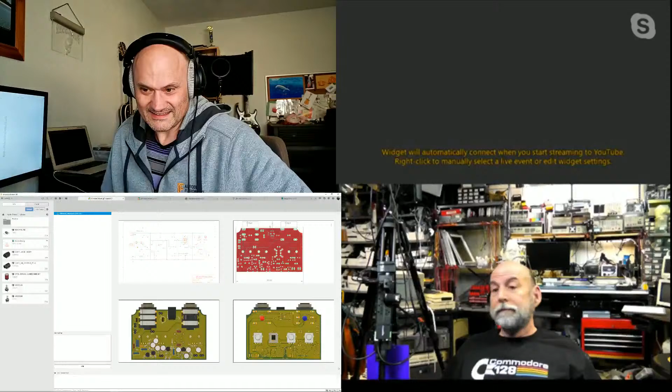So, yep, Bill's voice is hanging. Yeah, what can we do to fix the voice? What was the comment there? They said it's hanging. Like getting stuck? I was getting, yeah. You closed Opera, right? I did. I'm sorry. I'm hoping that by reducing other applications on the system that it... Now I lost you. This is not working. I've lost you. I can still hear you fine. All right, you're back. Yeah, it's just the Skype call bandwidth is obviously not that great. I guess this is the beginning of the end, and we're waiting for FEMA camps to open, right? Yeah. Anyway. Somebody's making a joke here.

So, since I can't talk very well, you want to show us, did you manage to pull up the Qucs example? Oh my gosh. Oh, sorry, I didn't mean to spring it on you. Yeah, but this is what it's about, right? You spring Qucs on me every time. Well, I've been advertising it for 4 weeks now. Well, we talked about it last week and the week before. Well, I guess we did. Yeah, I guess I was just wanting to see the physical PC board samples get into the model. You're right, we did talk about it. My apologies. Don't ever lose your short-term memory. It sucks. Have I said that before?

I forget. I made an interesting discovery about Qucs Studio this week while playing around with it, and I wondered how are they doing the FDTD simulation. So let's open it up, and I realized actually they bundled OpenEMS with it. So OpenEMS is a free finite difference time domain simulation engine that was written by a chap in Germany. It's open source and it works with MATLAB and it works with GNU Octave. And you normally use it with Octave and you write Octave scripts to drive it. So it's a programming based interface to generate the structure.

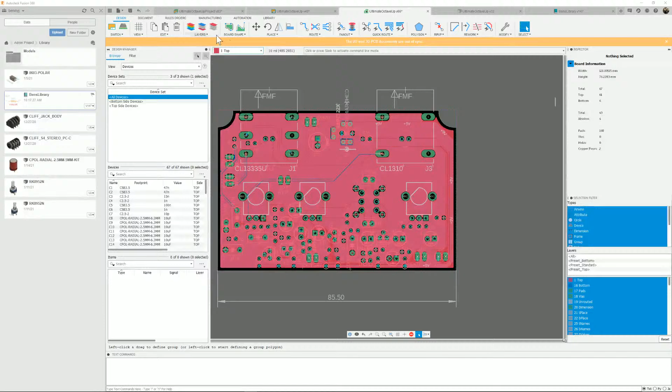I'll show you what I've been busy with this week. Yes, real quick, show us a project. So I'm finally getting my chops on this, which is cool. I spent a lot of time modeling parts. Again, this is not a complex design. You can see it's all through-hole and discrete. This is what I showed last week, the octave up guitar effect. I've been wanting to build one of these for myself for years, and finally used this as a reason. Can you make that full screen? Oh yeah, sorry. Just drag the corner. That's what I was doing, dragging them dynamically rather than reprogramming them.

Yeah, so this is the board layout. Simple 2-layer board.

Yeah, I see what they're talking about. I might as well not even be on this call. Really? I'm just locking up in the feed. I don't get it. Well, it's not taking the call, turning it around, and sending it out in an optimized way. I don't know what that is. Huh. Yeah, I look all grainy. All right, so keep talking now. I'm just showing. Cool, very cool.

Yeah, the rendering is really amazing here. This is updating because I've actually done some editing since, so you'll see there's a little status bar in the corner. It takes a little while because I keep chipping away at my library, adding better, more realistic models. Now, do you have the ability to make the color bands on the resistors reflect their values? No, that would be icing on the cake, though, wouldn't it?

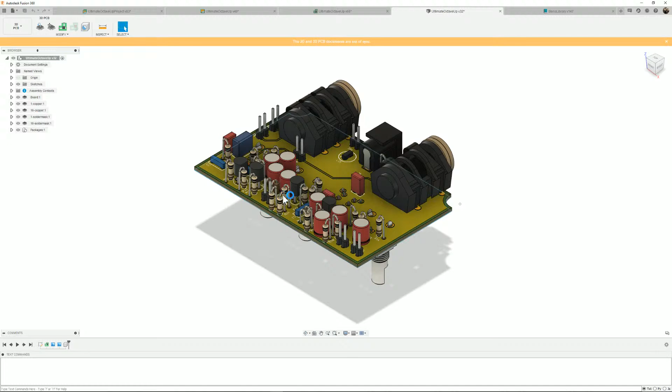Proteus can do that. Even Protel 99 SE could do that in the old 3D renderer, but since the support of STEP models and the integrated 3D in the PCB design, that capability was never implemented because it was seen as unnecessary. But my personal opinion is I would like to parameterize every 3D model of every component. Wow, why did I zoom right out there?

Let me zoom back in. I'd like to parameterize them and actually have them reflect the actual values, because one thing I can do in Fusion is I can build the models and add decals to them. It's not called a decal. What's it called? Maybe it is called a decal. I don't remember. But I can take a flat 2D image and wrap it around the surface of some part. So I could have text. I could have colors. And yeah, there's no reason why the text shouldn't be able to point to a parameter somewhere.

But that's way down on the list of priorities. There's a lot of other things I want to fix. That's just eye candy. But it would be cool. It would be useful. I'll tell you where it would be useful, because Fusion's all about this. It's all about not just design, but manufacturing. And one of the things you need to do when you're tooling up your assembly line is set up optical inspection. And so conceivably, we could use this rendering workspace with the component values printed on them and generate a reference image in 2D and 3D that the AOI machines could actually use as a source, even for the initial production run, to say, yes, this has been assembled correctly, or no, it hasn't.

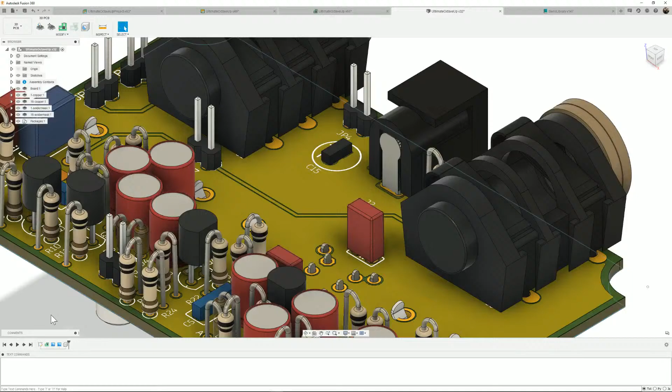But of course, chip resistors, you don't have color bands, but you certainly do have text, unless they're smaller than 0603. I think 0402s have text printed on them. Depends on the manufacturer. Much smaller than that, you don't. Right. But that's cool, because I can assign material properties to all these things, and even my diodes, you can see I made them with actual glass.

One thing now is the jumper. Do you have a jumper on a post header, and the jumper is on the build? How did you do the jumper that I saw? Actually, I'm just using these as connectors that I would solder wires onto to go off to switches. Right, but one of them looked like it had one of the jumpers on the post header. Was I seeing that? Not on this design, no. Yeah, that was probably one of these transistor bodies. Must be little caps then. Yeah, okay. I thought they were jumpers. Show us the diode then. I didn't mean to derail you there.

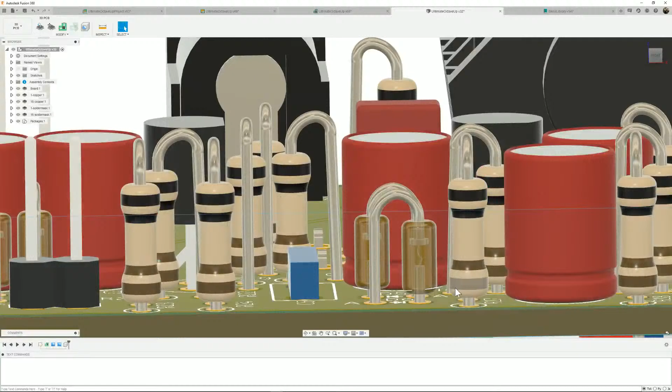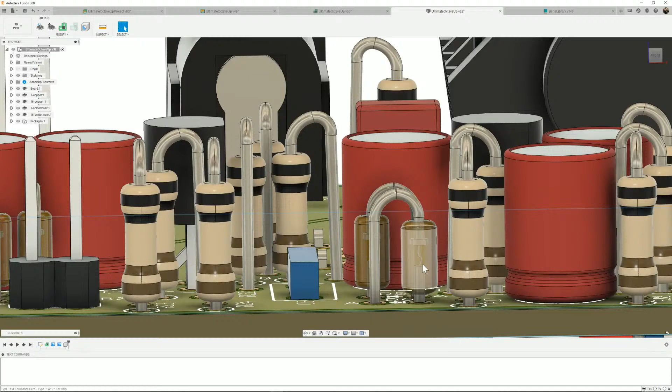That's all right. This is the diode model. Now in the library, it actually has a decal for a cathode band showing on it, but there's a display issue in the main workspace here. Same with these capacitors. I did put a negative stripe down one side, and they're not showing up in the main workspace. They do appear in the library. I'm hoping that when I do proper rendering the decals show up properly, but we'll see.

Something else I like is the way the printing of the silkscreen actually looks pretty realistic to what it would look like from a real silkscreen. These days, they're not actually screen printed sometimes, unless it's mass produced boards. They're inkjet printed. Inkjets, yes. So that's what I've been doing this week, and I'm actually quite proud of the result. I think it looks awesome, and the cool thing is I have the full assembly. So let's reopen my data panel so I can show you that too. I have to go back to my home.

How good is the library management? Are you making your parts that you'll have forever and other people can use? Right. My library is my library. So all these parts I'm making are in my folder, and I can choose to share them with others if I want to, but I don't have to. Right. There is a central library that Fusion and Eagle users can both access called library.io, and similarly you can build your own library parts and either choose to share them or not.

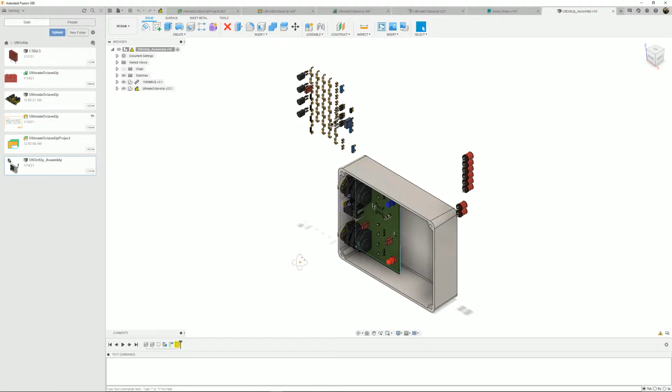But there's also a few 100,000 parts in there that are just like the default set you get with the tool, and everyone gets those. And by sharing, I tend to think of sharing inside a company. I don't usually think of sharing with lots of people, but inside a company, you would want to not have two people making the same part. Right. You'll get two different parts, even slightly different.

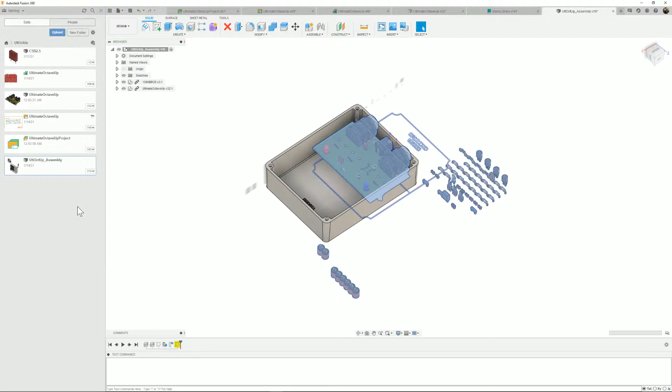Yeah, that's right. So this is telling me, because this is an earlier version before I placed all the parts and routed the board, that I need to update that. So I'm going to go get latest version. And this has integral version control in it? Yeah, everything is version controlled in WIP. And so you can go back. If you make a mistake, you can restore or promote a previous version, and they're automatically checked in and everything.

And you said this was a stomp pedal, an effects box? It is. That's really strange, because not everything's in the right spot. I don't know why.

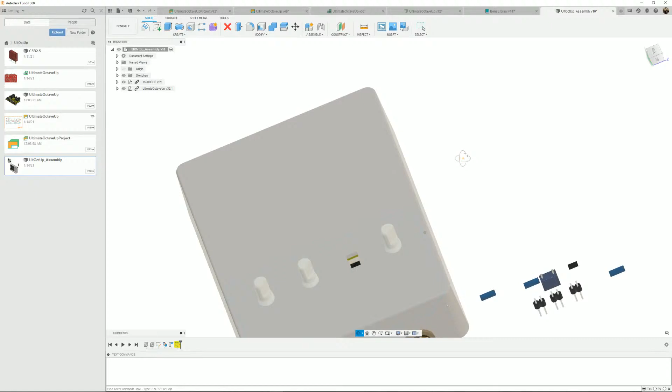It did allow me to modify the enclosure, though, to put all the appropriate holes and cutouts in it. Yeah, it looks like it flipped the parts 180. They're actually still lined up with the board, it looked like. Yeah. Oh, and it might also be because this has been updated and I haven't saved it yet. Let me save. Yeah, don't ruin your work because you're showing us. It's all right. No, this is all good, and the PCB layout's all good and fully routed and everything. I'm just doing final DRCs, and then I'll send it off to OSH Park or somewhere to get it made. So in a future video, we can actually listen to it.

How good are the DRCs that come with it? Because a good DRC set can make or break you, is my opinion. It can. The problem with anything default in any PCB tool is it's the lowest common denominator, right? So having said that, the default rule set is reasonable, especially if you're doing basic low cost boards. So the default clearance, for example, is 6 mil. Default minimum trace width is 6, and 6 and 6 was cutting edge 10 years ago, but today anyone can build those with good yield. So it's cheap and still gives you plenty of routing space, and you can do any kind of surface mount PQFPs and QFNs with 6 mils trace and space.

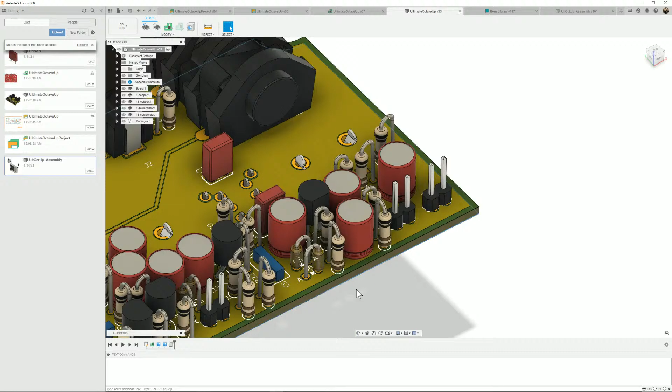And obviously this is entirely through hole. It's intended to be handmade in my shed, and then maybe I'll share it online and open source my board or something. I haven't decided yet, but somebody did mention that you can alternate the side the leads are on for the resistors, probably to reduce the chance of shorts. I can, yeah. I've rotated these purely for optimizing the routing, for making the routing easy. But my 3D model is obviously one-sided, so I can pin swap and move them around, but I'll just do it while I'm assembling it. I'll choose as I go which way I bend them. Right. But yeah, that's a good point.

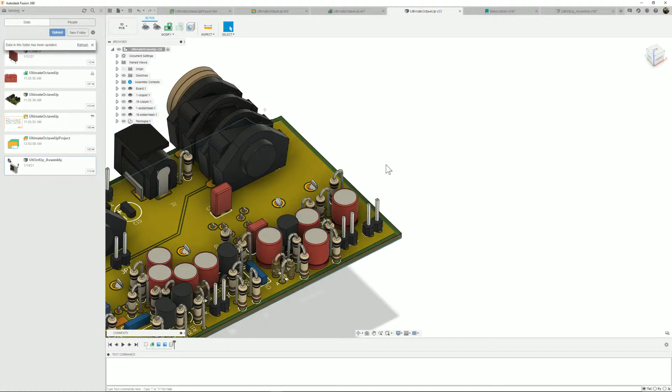So actually, it's a DFS. It's designed for shed. Design, yeah, set of rules, because it's for your hand assembly. I like this. It's not only designed for shed, it's also a guitar distortion unit, so it's also designed for shred. That's an engineering musician dad joke. That's like the trifecta right there. My kids would roll their eyes. Right. Outside the door, they're rolling their eyes as we speak.

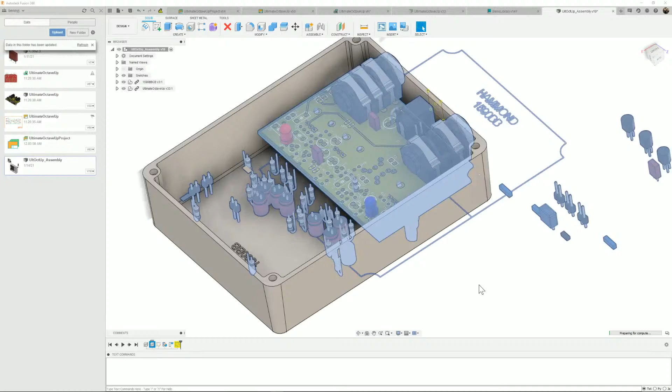So this has detected an update again. So let me do that, and hopefully it fixes it. I find it interesting that the PCB looks exactly correct, but all the parts are in the wrong spot. That's weird. Let's see what it does. It's the auto parts placement. Yeah, I think I've, on a live stream in front of everyone, discovered a bug that I need to go back to our developers with, but we'll see. It's still updating, so yeah, there's definitely a bug there.

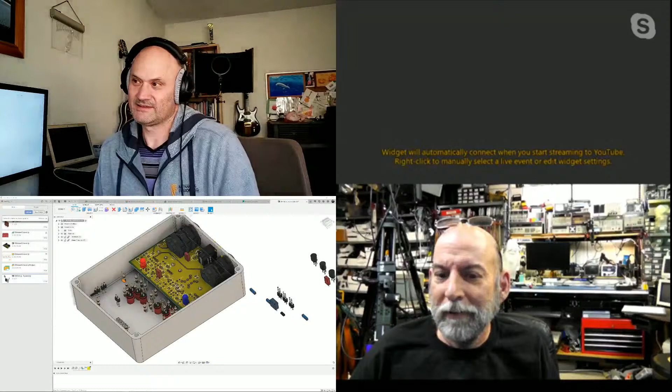So I mentioned auto parts placement, which I've used to help tell me if the board is going to be big enough, but I've never really used unless you constrain the heck out of it. Wait, you've got an auto parts placer? Well, Altium does, and Proteus does also. Altium doesn't. It used to. It had a menu item on the tools menu for auto place, and it did nothing. Hopefully I don't get in trouble for saying this, but it's factual truth, and any user digging into the tool would discover this. The auto placer design rules and the auto placer command were stripped out of Altium Designer some time ago because they could never get it to work well. But they left the command and the rules in there and didn't say anything.

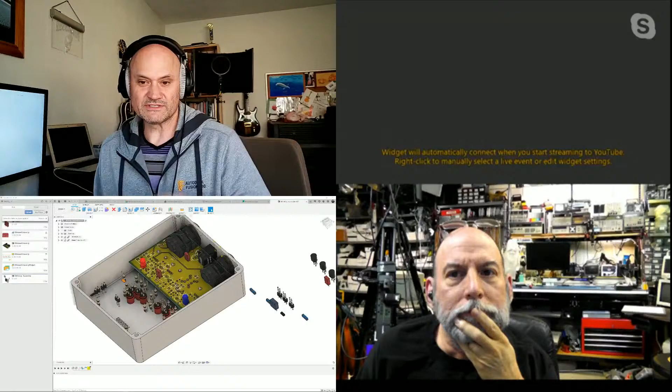So you can fill them out, and you can click the command and it will do nothing. It's a dummy command. It literally just returns and does nothing. Since version 18, when they did the UI update, that command was finally removed. But 17 and earlier, you'll see it there in the tools menu in the PCB editor, but it does nothing. You'd have to go all the way back to probably Protel 2004 to see it try to do anything, and it makes a mess.

Oh, yeah, I never said it didn't make a mess, but where I was headed with that was the last time I used a spreadsheet to predict parts usage, parts placement. Will it fit on the board is the question. And a good old spreadsheet answered the question. I mean, right down to it fit, and it didn't have extra room, but it didn't not fit either. So that's still a technique I use: for each DIP or each SMT package, it's that package plus a little more area, and it works most of the time.

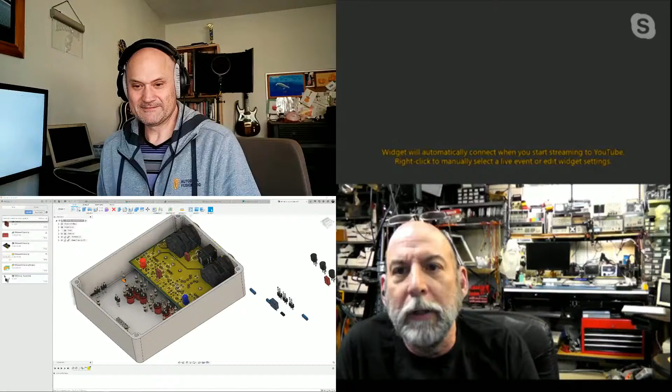That's good to know. But yeah, before that, I used to use the auto placer just to go, well, can you get it all on the board? Okay, can you get it in this corner? Okay, and constrain it and go through several iterations, but then tear it out and then manually place things.

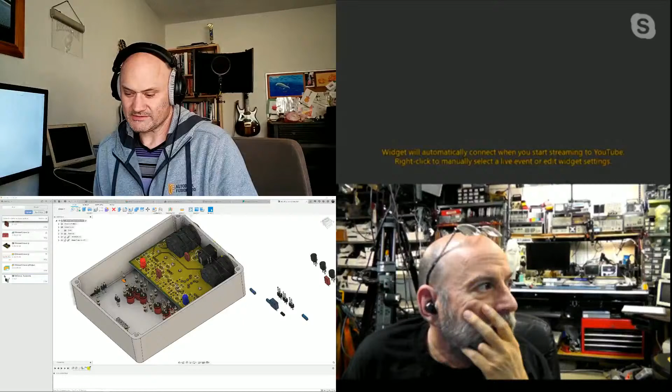You know what really blows my mind, Bil, is for years, place and route automation in the semiconductor tools has worked just fine. Why do the same algorithms, or maybe they're not the same? Maybe that's the problem. How come we can't get an auto placer to work on PCB? Because I haven't seen one yet that actually does a reasonable job.

Would it do a reasonable job on a 20-layer board? Because the chip is essentially 20-layer or whatever number they're up to these days, they've just got many metal layers. Well, that's true, but that's for routing. And I guess place and route, we lump those together in chip tools. It's always called place and route, right? But the placement of the cells, the parts or macros, really the components, we ought to be able to do that in PCB. I just don't know why no one's really been able to nut that one out.

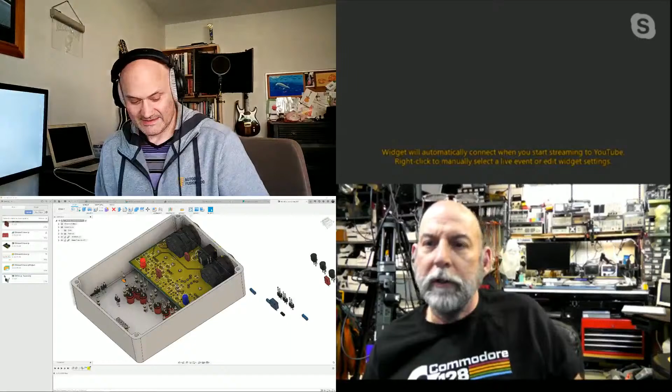I assumed that it was the people in the industry telling the CAD developers that you can make one if you want, but I still won't use it. Maybe. And I, for one, would use it. If you made a good one, I would use it and then adapt it, because I do rapid turn stuff right now. I'm not doing true design for manufacturing with full signal integrity and stuff. Yeah. I would at least use it to get the initial placement, and then you go in and tweak it, right? And you rotate things.

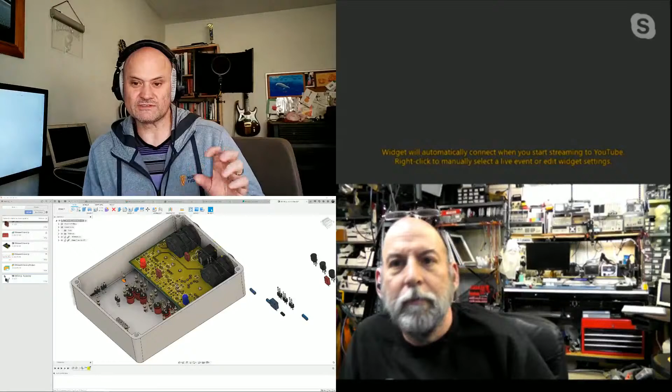So Mike asked if transmission line effects come into play inside a chip. I know my answer, but I'd like to hear yours. Depends on the frequency. They always do, but it comes down to: are you dealing with lengths of signal paths that are greater than 1/20th of a wavelength of your signal? 1/20th or a quarter? A 20th. By the time you're at a quarter wavelength, you've got a whole other kettle of fish. That's where you're doing transmission line structures for filters and stubs and all of that. Those are all around the quarter wavelength size. But when you have to pay attention to reflections, transmission line effects and impedance matching is at about a 20th of a wavelength.

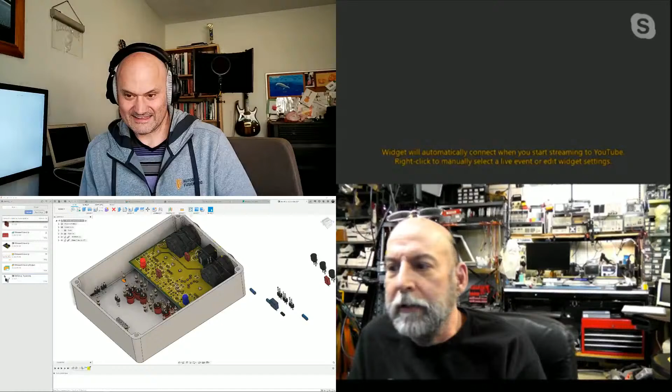So I know a chip guy I can ask, but my answer would have been, no, it's all about the quantum tunneling effect at those sizes. When we get down small, we kind of throw away the effects of fields and we go back to the effects of electrons. It's the way I look at it. I could be wrong. Well, that's above my knowledge level and pay grade. See, you've studied quantum mechanics. I haven't.

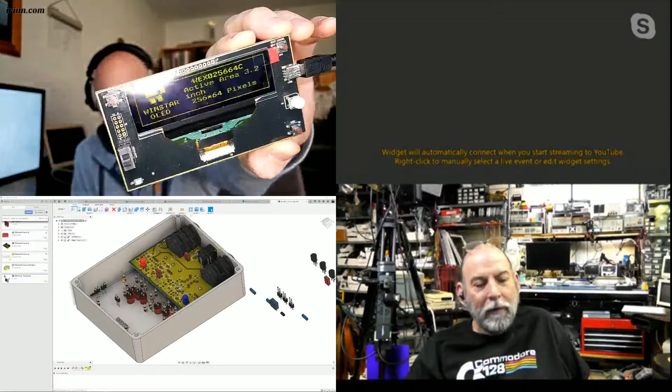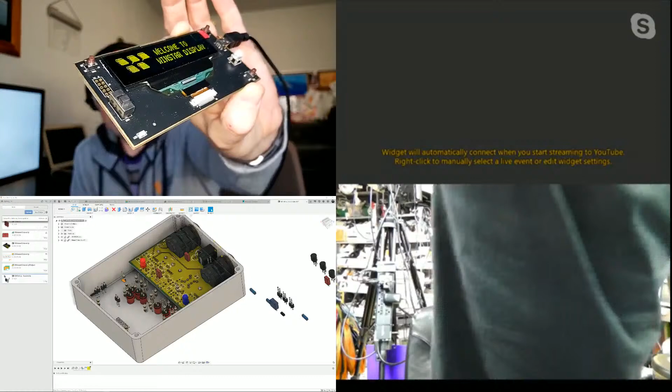So you showed a display a little bit ago. You want to show that again? Oh yeah. This is the what's on your desk question part that Bil was asking me. I was fooling around with these WinStar OLEDs. This demo board they gave to me at the Del Mar Electronics Fair quite some time ago, I want to say 10 years ago. But it's the same driver chip, and I'm working on another design that's got to have a daylight readable display.

And I purchased a couple of samples of the bright daylight readable blue one. And luckily, I don't have to wait for my own prototype to test them because they happen to use the same connection pinout and controller chip. So I'm just popping this onto the flex connector.

So while you're doing that, I had pulled out my display that I found 2 days ago. I had built a single board 6502 right before the pandemic hit, and this was to show that I could run a 20 megahertz 6502. And so I had a vacuum fluorescent display to go with it. That's cool. That's a nice color on that.

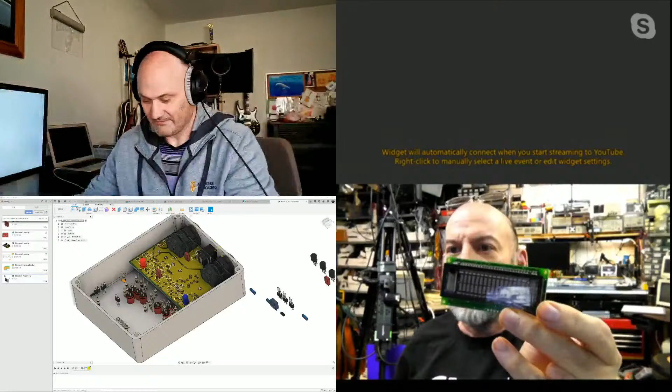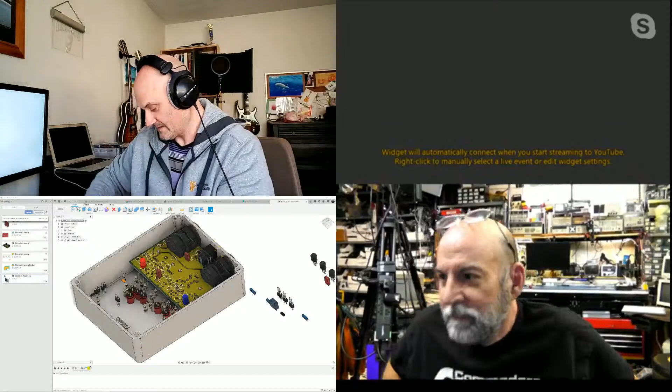They were $30 each. $40? They were $30 each for 2. I was guessing 40. Yeah, okay. So not far off.

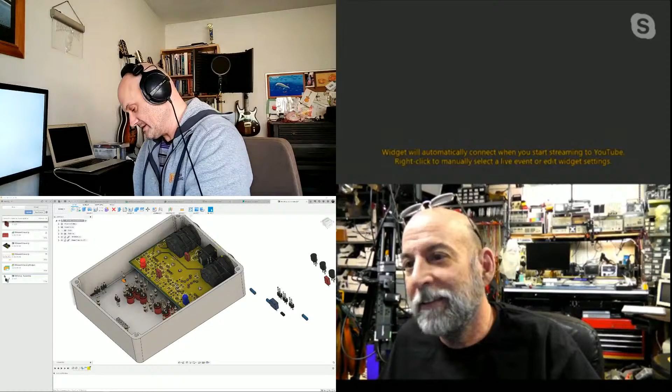Yeah. So what I was showing was a vacuum fluorescent version of the little 2-line by 16 character. Yep. And I was going to put it with the single board computer just for nostalgia's sake, right? Because I was like, I need some kind of display. So, let's go with vacuum fluorescent. But otherwise, it's that same footprint you see everybody using for 2x16s, 2x20s.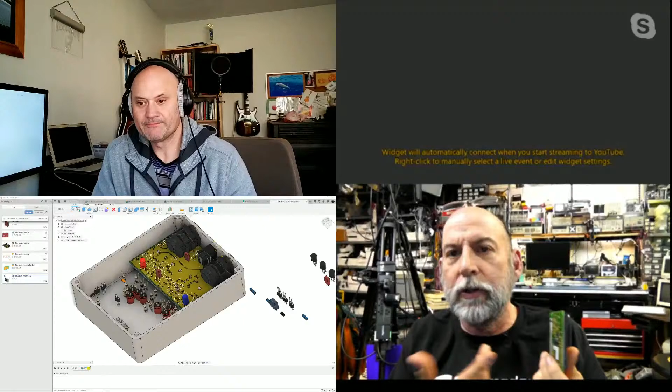Now, what's the power requirement on those? Because they chew a bit more. I was going to say it's got a little switching regulator, and it creates its own high voltage all on the board. Yep. But how much? And I know there's a switching regulator because there's a coil. I mean, that's what we look for. Because they need to step up. They need like at least 60 volts because it's a vacuum tube.

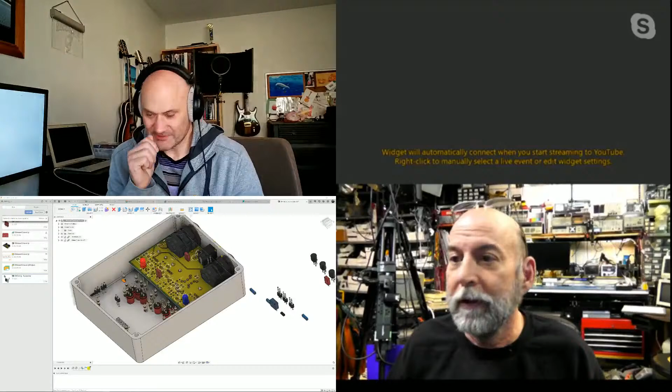Right. It's actually a triode. Yeah, it's a triode, and the anode has phosphor on it that lights up when the electrons hit it. The anode has phosphor. The cathode is the heater. Cathode's the heater wire over the top. Yep, there's a heater wire over the top, so that has to be biased up to 60 volts, and it gets about 5 volts to heat it up. So you need a secondary that is floating. So you need a little transformer normally. This is how we used to do it.

I used to service TTYs that had vacuum fluorescent displays. They had these little self-resonant step-up converters in them that would get really hot. They'd be ringing all over the place. There's no way they'd be allowed to do them today. There's no way they'd pass EMI regulations.

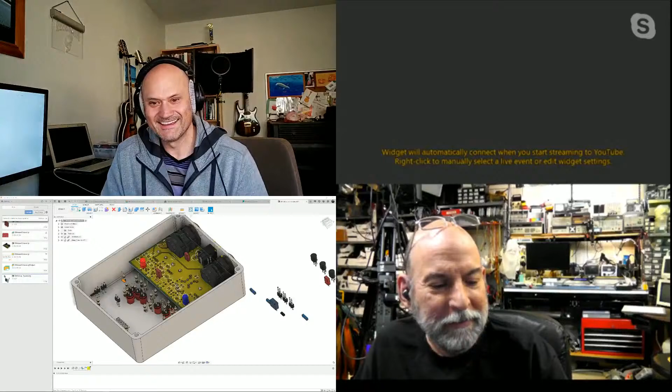And I had done a design that had several different size vacuum fluorescents, and I wanted to drive them all from the same 80-volt supply. So what I did was I took the outputs of transformers and I took their center taps and made them go to various voltages so that one would think it was biased off 60 and the other 80, and meanwhile the center taps are 20 volts apart. So I found a way to isolate them and still drive them from the same column and row drivers.

Oh, that's cool. Because it was all about multiplexing, but I didn't want to have one multiplexer for one size and one for the other, so I multiplexed everything from one set and just changed the center taps. So yeah, it was something I never read about, but it made sense and it actually worked. So where do you get VFDs?

And now suddenly, because a few magazines publish hobbyist articles where they're building VFD Nixie tube clocks, because of course we ran out of the neon Nixie tubes, now we've got the VFD versions as well. And suddenly anything VFD is horrendously expensive, even if I'm shopping on AliExpress. Right. I acknowledge that they do cost money to make. Anything with a vacuum in it made of glass is expensive.

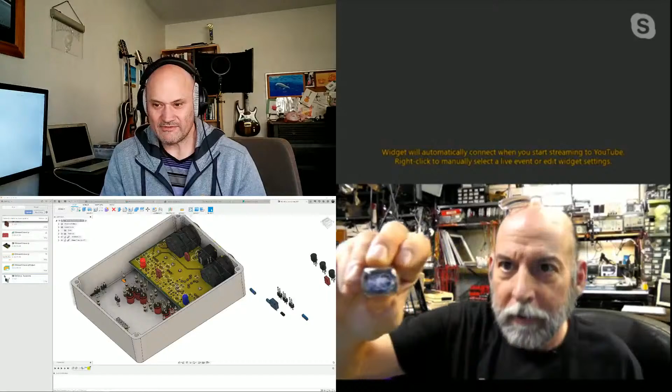Right, and there's one of my leftover Nixie tubes from years ago. It's the Russian one, probably. No, it's written in English. I should have brought them in out of my shed, but maybe another episode I'll talk about triodes. I've got a couple of boxes of triodes for audio and guitar stuff, but the cool thing about the collection I have is most of them were actually made in Australia by AWA, back when every major continent had its own tube manufacturing companies to support the electronics industry.

Sure. Yeah, my dad worked for RCA. My dad was a ceramic engineer for RCA making picture tubes. So literally a vacuum and getter and the anode button was part of what we talked about at dinner at home. Cool. It's cool stuff. So they're nostalgic.

I think most of them are in brand new condition. And my intent was to use them in guitar preamps, but now I'm doing everything digitally. So let's talk...

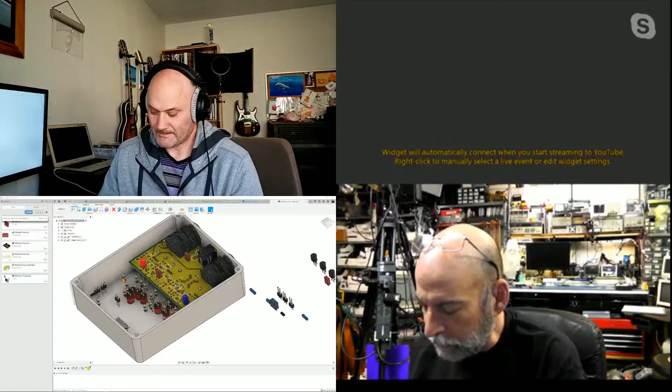Right. So you mentioned triodes, which aren't real common in tube gear for a reason, but they're useful in audio preamps for a reason. You want to talk about that real quick? They're almost entirely used for audio preamps. I don't know if... RF preamps too, are they? Yeah. Okay. Well, they're the simplest device, and they're the easiest to design around. I think that's probably why.

I don't know enough about it. In valve theory I was taught they had less noise, without the screen grid. So what we have in a triode is a simple grid, anode, and cathode. And then when you get to a pentode, you've added a screen. I'm going to forget all the elements, but I used to know them. So they can make it more linear in a pentode, but it's got more noise. That's what I was taught.

Yes, and pentodes for the linearity are used in the power amps, especially. Most of them are push-pull through a transformer, and most of the linearity, apart from clipping, comes from the magnetics of the transformer. Right. And then what you'll see is negative feedback come from the transformer. They'll throw a little tap on the transformer, bring it back and put it in as negative feedback.

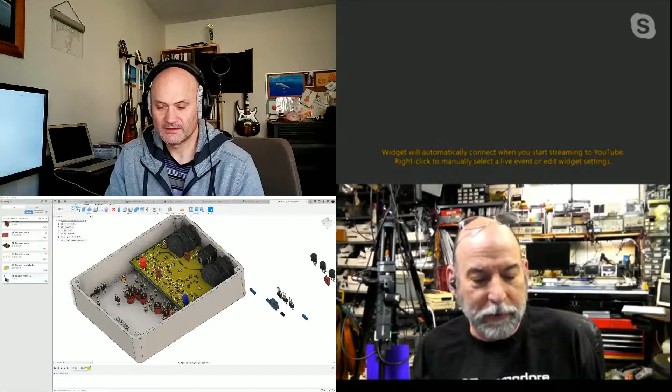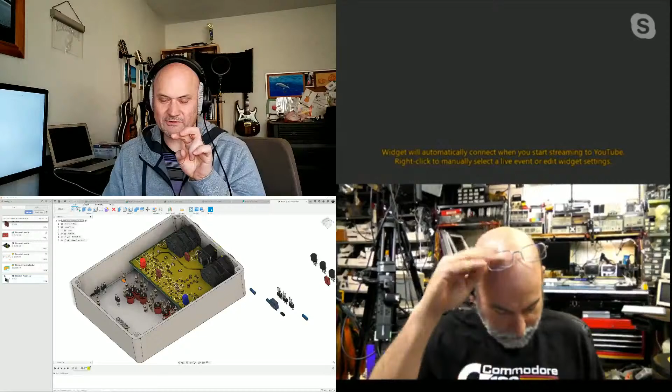So our earliest, before op amps, well, they used to make op amps out of tubes, but we were doing negative feedback in the audio amps years ago. That's right. They were called Philbrick, weren't they? The op amps made of tubes were called Philbrick op amps, and they had two twin triodes, like two 12AX7s or two 12AU7s. So they had four triodes in total, two for a long tail differential pair input stage, one gain stage, and one output. I keep saying emitter follower, but it's a cathode follower. Cathode follower, right?

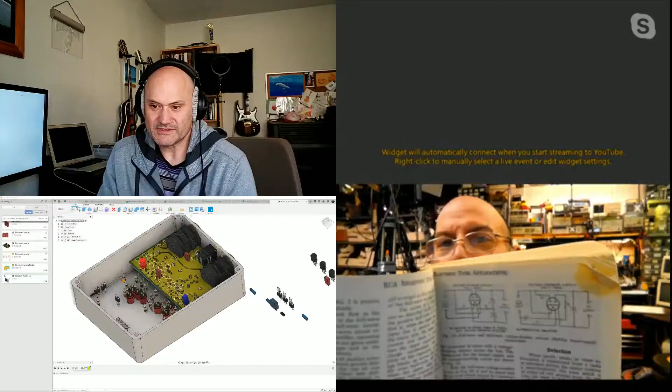Yeah. So in my old tube book, they still show you how to use tubes. That's awesome. Right in there, they tell you what grid leak bias is and all the different discriminator circuits, and how to make them. Yeah, grid leak bias is why you put a resistor in series with the grid. In the preamp, it helps, and it develops a negative voltage on its own. It's kind of like a Venturi effect for electrons, is the way I always picture it. It developed it by the electrons being swept along to the plate, and it'd be about 7-8 volts negative you could develop. So good guitar preamps even have a grid stopper or grid leak resistor. You don't have to do it, but they improve performance.

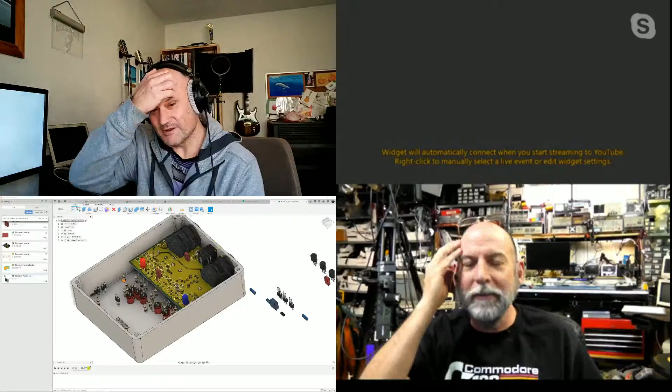Right. And then of course I'm from the days when picture tubes were round when I first started. I can't imagine the pain of looking at those. Especially the old Zenith, like a bubbly rounded rectangle that was only this big. Right. Then they put a thing on it to make it look rectangular, but it's still a round tube behind it, and you lose everything in the corners.

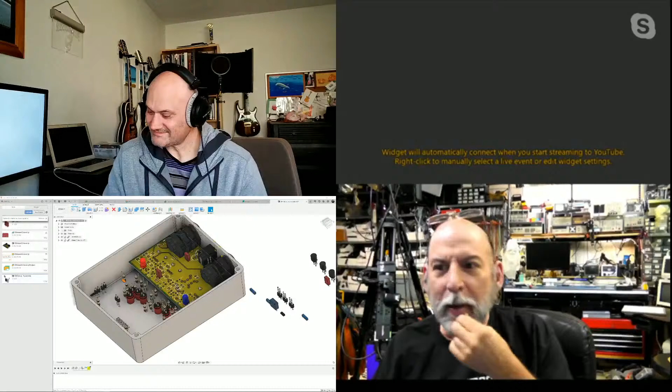So we used to chuck them off the bridge over the railroad tracks. Bad boy. And one time the police came to see what we were doing, and being very tactical, we turned around and acted like we were walking towards the source of the whoomp, and got away with it. Yeah, you do it at night, you'll actually get a flash of the phosphor. Oh, I didn't know that. Unfortunately I do. Yes, I have thrown a picture tube at night, or thrown a brick through one. But I used to have all the kids in my hometown bring me all the chassis they could find, so I'd end up with a couple spare picture tubes too. So we had to find a way to dispose of them in an artful way. So, one for you.

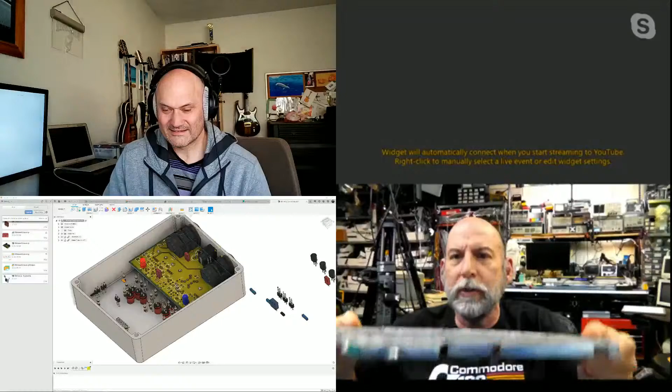I was telling somebody that this is a heat shield off a Commodore 128. It's an EMI shield that has heat sink tabs. Matter of fact, you can see the bird shit on my fingers. So the chips wouldn't have needed a heat sink until we put the shield on. So we made the shield back into a heat sink, but it's got huge gaps in it. That's why I was telling somebody those gaps are math. The diameter of that hole has math behind it. The spacing of the holes has a little more art than math, but maybe some math behind it. Yep. So it's aperture. That's right.

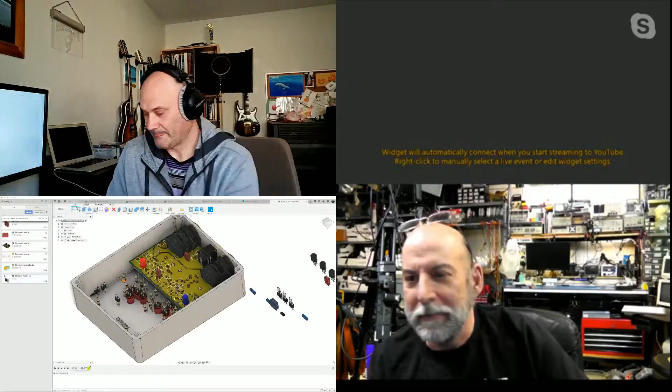They won't shield. Go ahead. No, they won't shield millimeter wave, but they'll keep pretty much everything else in. Yeah, we only went up to 350 meg in FCC scans back then.

I'm surprised that the chips actually needed a heatsink. They only did because we created a closed air area, and I needed to conduct the heat out. It also, honestly, helps cool the PC board, which is the real heatsink. Yeah. So most people don't know, because I've been told you designed without a heatsink. No, I have it in the biggest heatsink in the whole computer.

It's called the PC board, and I can't remember, but I want to say at least 60% of the heat leaves through the PC board, through the lead frame that holds the chip, through inside the chip carrier, through the leads to the PC board. Yeah, but PCBs are terrible heatsinks. They are, but they're big. They're bigger than the chip typically.

They can be good at transferring if you got nice thick copper in them, but you need to take it somewhere where there is a proper heatsink. Oh, you can. You're absolutely right. You can make the PC board into a wonderful heatsink or a heat pipe, right? Yeah, but then you have to worry about the materials as well, because Z-axis expansion is like one of the worst enemies of a digital design when you go past 6 layers. Yeah.

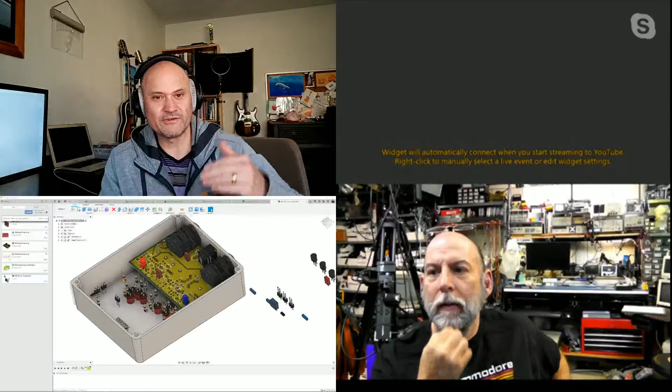So if you have very small vias, they can crack open in the Z-axis, or maybe they work fine, but if there's a lot of heating and cooling cycles in the product's life cycle, it can shorten the lifespan of the product pretty dramatically. So that's one of the parameters you look at when you're looking at PCB materials and deciding which one to use. If your product has to last a long time and be reliable, it's worth investing in better materials that have a lower coefficient of expansion in the Z-axis.

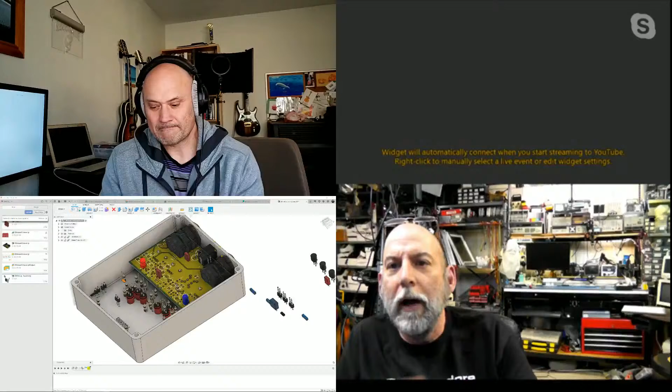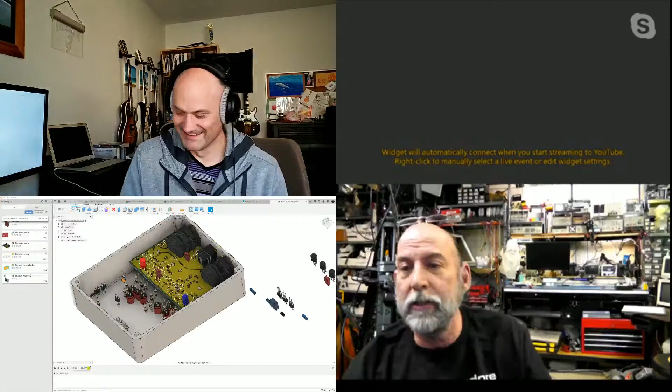Right. And I'm from the days when vias used to be inserted. They were little sleeves that got inserted into each hole. If here's the via and here's the pad, you could crack here; you'd get expansions and contractions, and eventually your pad would float free of the via barrel. And then one day we said, let's do away with via barrels. I forget what we called them, inserts. Yeah. Sleeves. Spigots. And we started blowing the solder through, doing all kinds of things as we tried to learn how to.

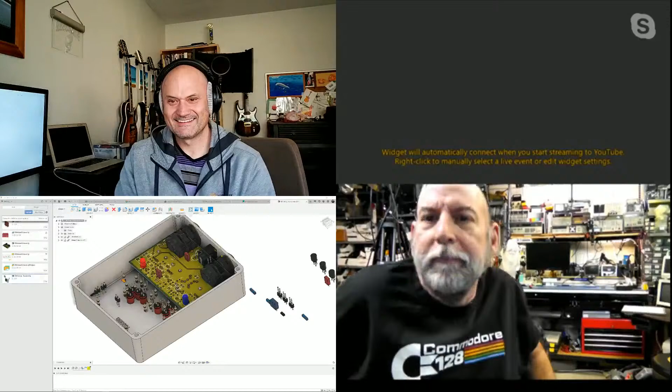And for us, we did such mass quantity that the less solder that left with each PC board, the more money we saved. That doesn't sound like it'd be very big, but we'd save $1,000 a day, per line, in solder or something. So, yeah, we started doing optimization. Up until then, we had done tin solder under solder mask, and you know how it gets all wrinkly. One day we said, why are we doing this? And we started doing bare copper under solder mask. But up until then, all our boards were crinkly.

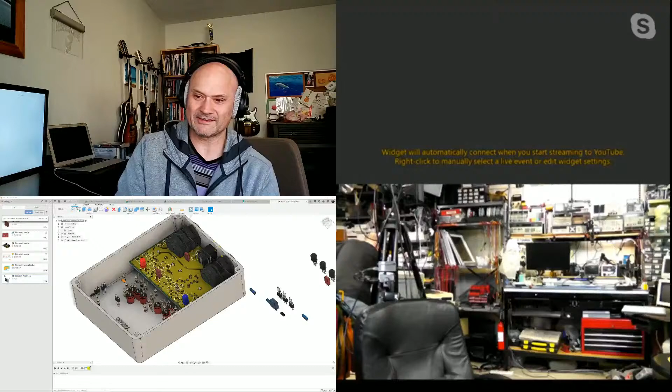Yep. And I actually remember servicing products like that and thinking, I wonder if they did this for extra current carrying capacity. And there were other products I've messed with. I have, still in my parents' basement in Sydney, an old Peavey DECA 528 audio power amplifier. It was a first generation Class D touring high power audio amp for PA systems. I was amazed because it was only one rack unit high, in a small box, and it delivered 250 watts RMS per channel.

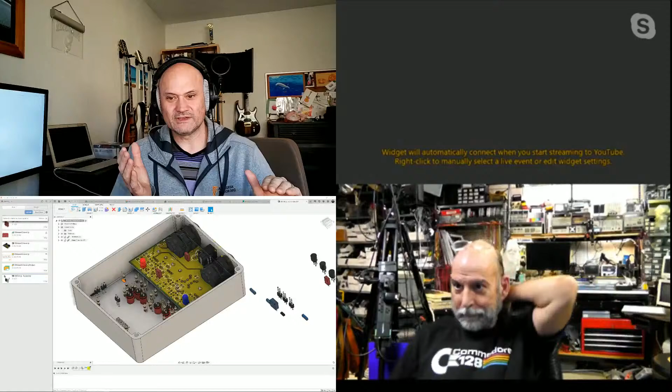Wow. Into 8 ohms, and it was 528. Yeah, maximum. I think you could do bridged 500 watts RMS. But the point was, this thing is so small and lightweight. How do they do this? It was a Class D amplifier with a switching power supply. I was going to ask if it was D. But the problem was it was the first generation of those.

Now everything is Class D and everything uses a switching power supply, and it's all bulletproof. They all use really fancy topologies for the power supply, like LLC or other resonant or semi-resonant converters, so they're very low noise as far as EMI goes. Super reliable, lots of math in the design of them. But back then it was just a brute force PWM push-pull.

And they were so slow, it was hard. The devices would spend so much time outside their safe operating area between off and on. If it's in the middle, that's where the heat comes from for these devices. Class D amplifiers, by the way, are switching amplifiers.

Do you want to explain Class D for us? You can. Go ahead. Well, they're basically on or off, and what we hear as audio comes out of it. But if you're not spending your time half on or half off, where I squared R is the power you're dissipating. So Class A was just one linear amp.

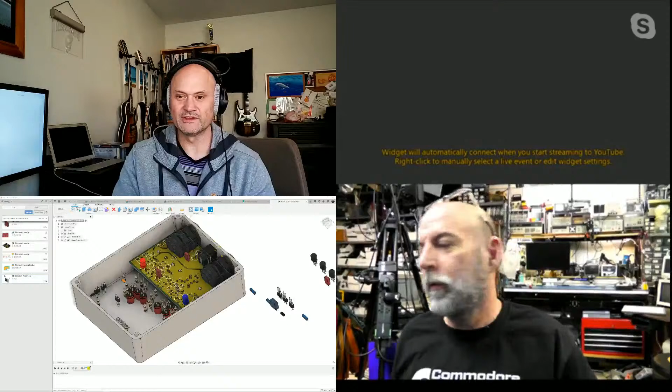And so they get super hot. You need a lot of heat sinking, you need cooling, and you need a big power supply. And the theoretical maximum efficiency of a Class A amplifier is 25%. So I did know that. So that means for every 25 watts of output power to the load, you have a 100 watt power supply driving that thing and 75 watts of loss.

That's a lot of heat. Doesn't sound like a lot. It is, when you think a modern Intel CPU is 90 to 130 watts, depending which one. But Class A amps, they sound awesome because of the linearity. They exhibit less distortion in other ways. They sound awesome, but you need big power supplies, and it's going to be a space heater for your room.

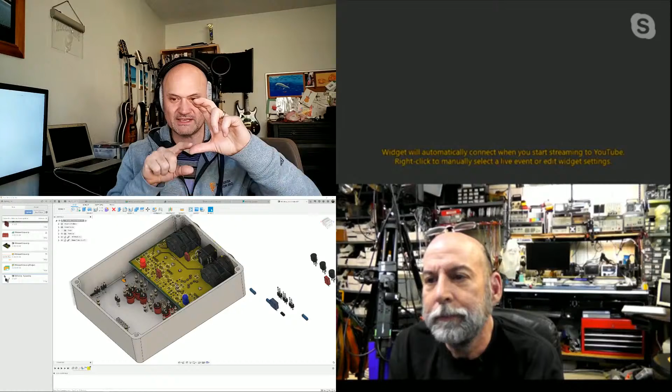So Class B improved the efficiency by putting two transistors or two tubes doing push-pull, either push-pull through a transformer or positive half cycle, negative half cycle. Or just a circuit to balance it. Yeah. So you have separate devices taking care of each half of your waveform.

And so the problem is you get crossover distortion. As one device turns off and the other starts to turn on to take over, there's a flat spot in the middle of your waveform. Great way to describe it. That introduces horrible, unpleasant harmonic content.

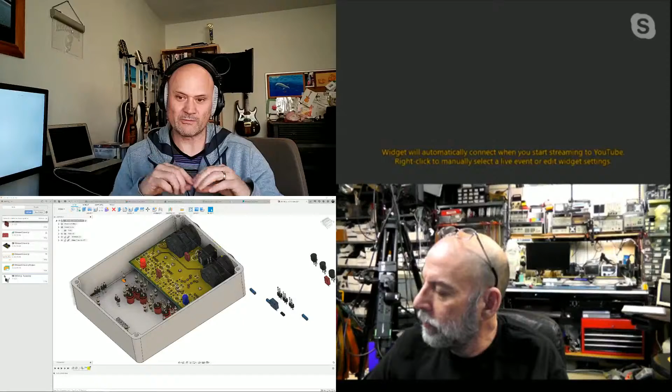So a Class B amplifier, I think, is theoretically 70% efficient or 75, but it depends on the waveform. If you're driving it to full power with a pure sine wave, the maximum theoretical efficiency is like 75 or 78%. I don't remember the math, but it's to do with the area under the sine wave versus the area over what would be a square wave for that.

But to get around that crossover distortion, and you have this problem in op amps as well. Op amps often use a Class B or Class AB output stage, and there can be crossover distortion. So you need to check that when you're speccing op amps for audio.

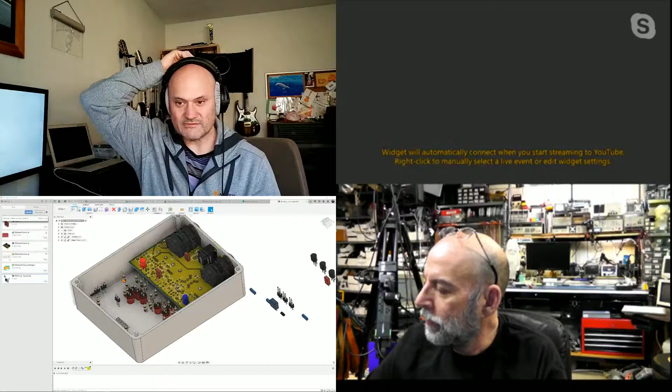And AB is where they biased it for minimal crossover distortion. So at all times, both transistors are always conducting a little bit and wasting a little bit of heat, but they're biased on, ready to go as soon as they take over for their half of the wave, positive or negative. So they're a bit less efficient, but lower distortion, much lower distortion. So that's a happy compromise.

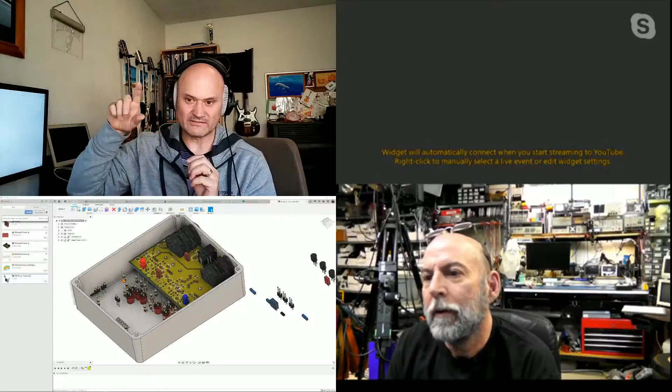But then Class C, which is never used in audio, it's only used in RF output stages. They go up to about 80% efficient, maximum theoretical, and that's a single transistor with an inductive or a tank circuit load on its collector, or if it's a MOSFET, on the drain. So it looks like a Class A, but it's getting pulses. And the pulses turn it fully on for a moment, and then it rings, because it's like a pulse source for a tank circuit, and that generates a ring.

So that's how carriers are often generated for RF power amplifiers. Right. And then that can be shaped through other means, other special RF devices that can amplitude modulate it or whatever. But that's a Class C.

And then came along Class D, which is pulse width modulation. It's like a switching power supply where you have high power transistors that are either fully on or fully off, and switching at a very high frequency, and you modulate the pulse width with the audio or analog waveform, and then you filter that out with low pass filtering before it goes to the load, like the speaker.

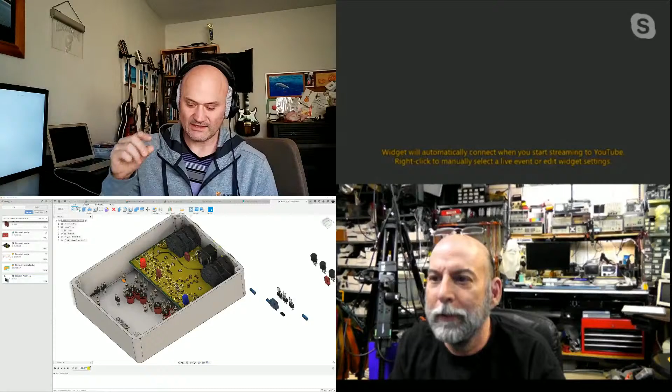And if you weight the signal with the audio response curve, like A weighting, which is an aural weighting that takes into consideration the psychoacoustic interpretation of the signal by the human ear and the brain, then you get very low distortion, but theoretically 100% efficient, because the devices are never in their linear region. But of course, there's always some switching delay, so there's always some loss. So most Class D amps.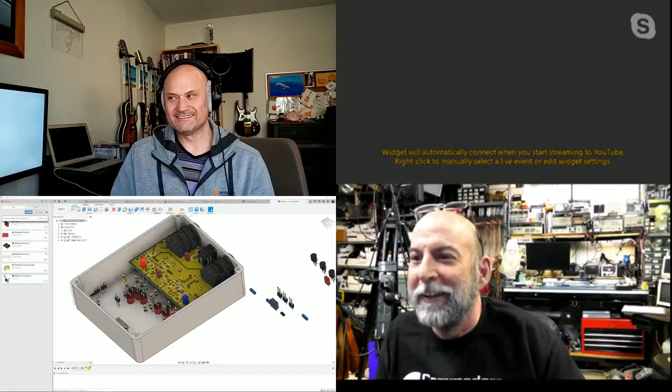So you're saying somebody ran an FIR on the human ear there, then? You could say that. Use your example from last week. So somebody had to model it, but you were talking last week about using an FIR to model an amplifier. That's right. Right? To derive its harmonic content. Yeah. But then they do add some juju for what the human.

We used to like warmth, right? We would describe an audio amplifier, and they would add some 60 cycle hum, and we go, oh, that sounds warm. Yeah, and put the rubber hose flavor back into the pipe. So it's stainless. Yes. That's the best analog I've heard for why people still like tube amps, because it's like drinking through a rubber hose, and we always could taste a bit of the rubber, and it's actually imperfect. But it's what we know. It's what we're used to.

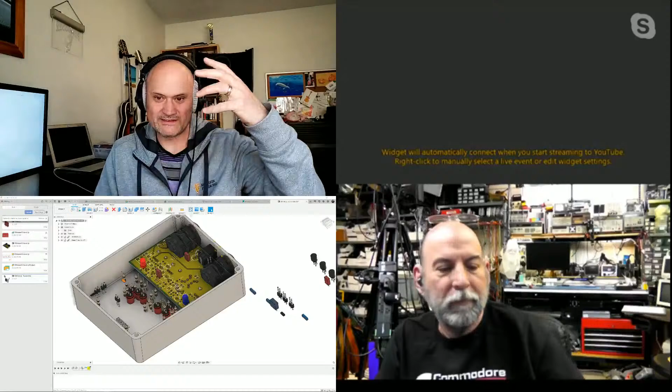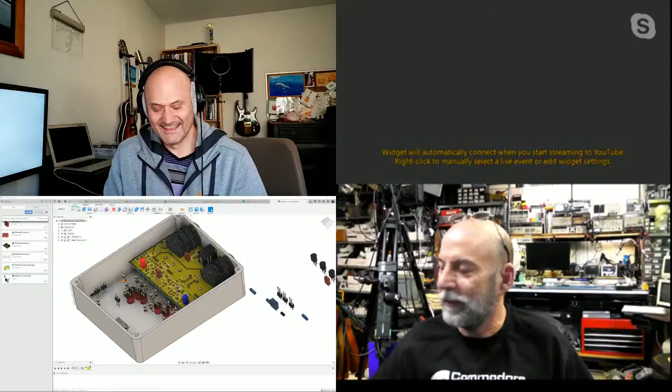Right. And when we finally got a stainless steel pipe that took that rubber hose flavor out, it's like having the imperfections of the dirt that the grapevines grow in affects the flavor of the wine, and we could purify the dirt and grow better grapes, but then some critics would say, I don't like this, it doesn't have the distortion flavor. So yeah, put the flavor of the rubber hose back into this stainless steel pipe. And so we modeled a rubber hose as far as amplifiers are concerned.

So are there classes of amplifiers after D, E, F, and G? They're not official. They're not officially recognized or sanctioned, I think, by any industry standards body. But there's been class Gs, class Hs, and these terms are made up by their inventors. So Yamaha, for example, came up with this technology just before class D amps really took off, but they were looking for ways of reducing the size and weight of touring amplifiers.

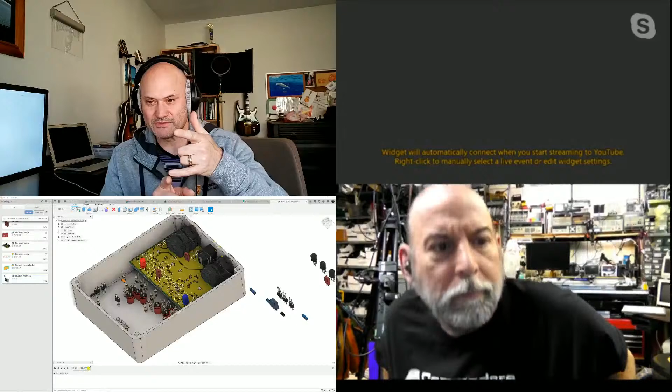And so they came up with a class H, I think it was H, where they have two voltage power supplies. They have a high voltage supply and a medium voltage supply. And instead of two sets of output devices for the class AB stage, they have four in a totem pole configuration. And when the signal is beneath the medium voltage, it's only the inner pair of devices conducting.

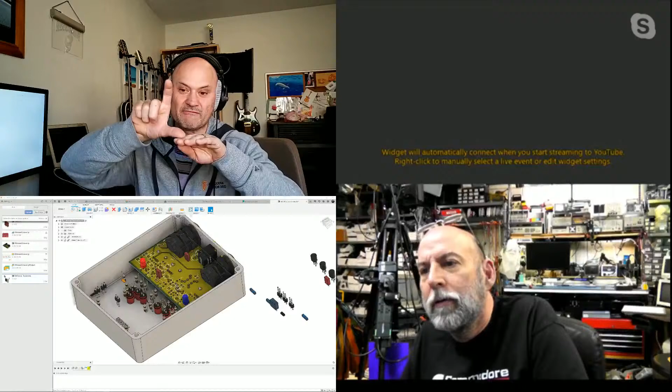And then when the voltage peaks up higher and needs more power, like when you hear a kick drum hit, the waveform goes up beyond the power supply of those main transistors. They're not switching transistors, they're class B, class AB. Right. We used to call them hybrids for that. That's why it's called a class H, for hybrid. So it goes beyond their power supply, they remain hard on, and then the transistors above them kick in and start delivering additional voltage through their emitters from the higher voltage rail.

And so the problem there, again, like class AB, is you get some kind of crossover distortion whenever you're changing from one device to another. And they did another trick that was a little bit nasty. They built inferior, well, in our opinions at the time; they actually worked totally fine. There was nothing really wrong with it. It just made them more complicated to fix if anything went wrong. They had a power supply with these additional voltage rails, but for the higher voltage supply, they didn't have a very high powered transformer driving it.

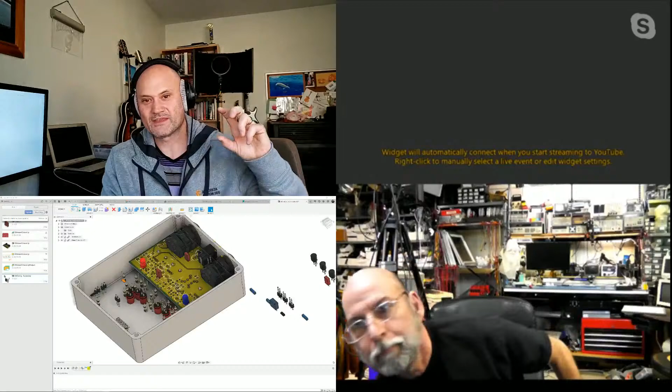They just had a lot of bulk storage capacitance, because what they did was they analyzed music sources from concerts, live production, and they figured out, at average concert volumes and at average musical tempos, what the power demands were over time.

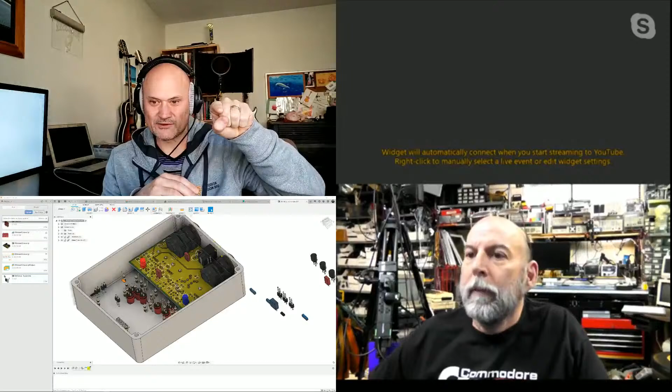And they realized we can have a smaller power supply but more bulk storage capacitance to drive these higher power output devices. So the energy's there when the kick drum hits on beat, but for the whole rest of that brief time between that beat and the next beat in the music, we don't need that much power. Right.

I had an old Pioneer power booster for car stereos, truly from the 70s. They used terms like turbo, and they had an LED that would actually light up when it'd kick on that additional voltage. That's your retro encabulator right there. It is. I can't bring myself to throw it away. I would never use this today. It's got so much distortion.

Oh, they're horrible. Car audio is the worst. I hated those things. And I can't throw it away. I've had it since I was like 19. So let's see, I'm 61 now. So that's a 40-year-old device.

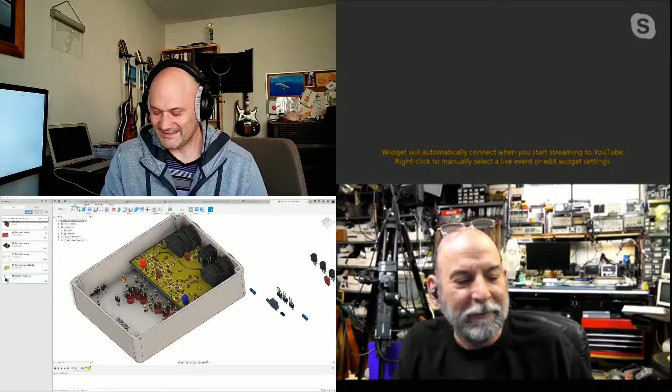And I really always resented the marketing around every car audio product. It was riddled with blatant lies. It was like, 2,000 watts PMPO. What does that even mean? Peak music power output. Or they tell you the power consumed by the amplifier, not the power output. That's right. And then of course there was hi-fi. I'm from the age of hi-fi. So that implies that before then it was lo-fi, and really it was all the same fi, fidelity.